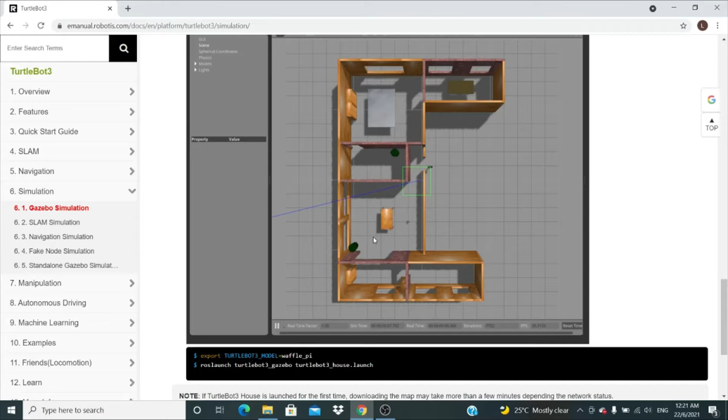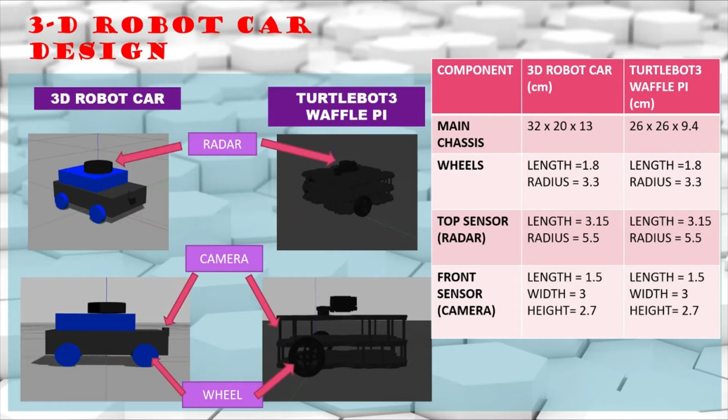The robot car design is mostly influenced by the dimensions of the TurtleBot3 Waffle Pi model, such as wheel length and radius and the position of the sensor relative to ground. The table shown compares the dimensions of the TurtleBot3 Waffle Pi and the designed robot car. As you can see, the wheel dimensions and sensor dimensions are similar.

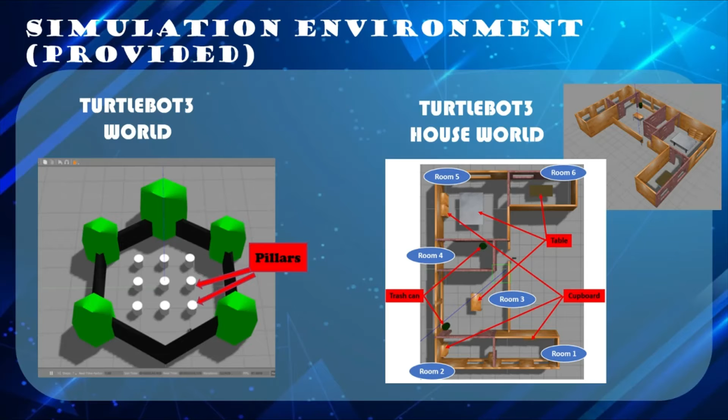As for the simulation environment, the provided simulation environments such as the TurtleBot3 World and the TurtleBot3 House World are used as early driving routes for the robot car. Obstacles such as pillars, walls, and furniture sets are present as variables during robot car driving simulation.

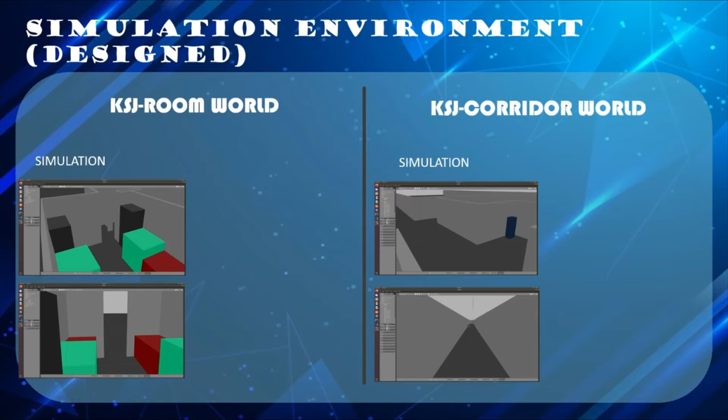Next, new simulation environments were created using the Gazebo Building Editor feature. Two environments were created, which are KSJ Room World and KSJ Corridor World. These environments are designed replicas based on Kolej Siswajaya, Universiti Teknologi Malaysia hostel room and corridor respectively.

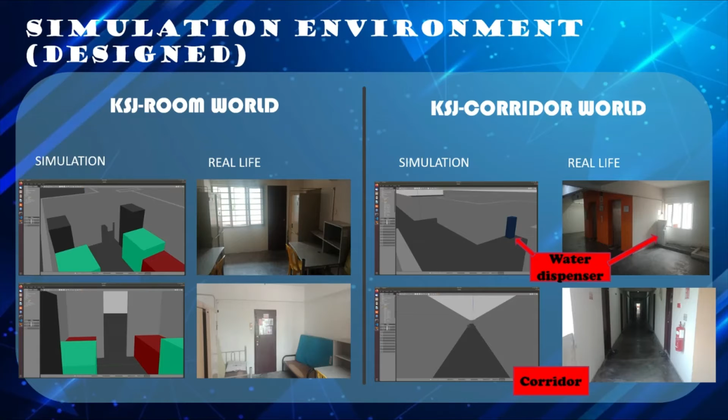Obstacles such as lockers, beds, trash cans, and benches are included, similar to the real life ones. Measurements of each exterior were measured manually using a measuring tape.

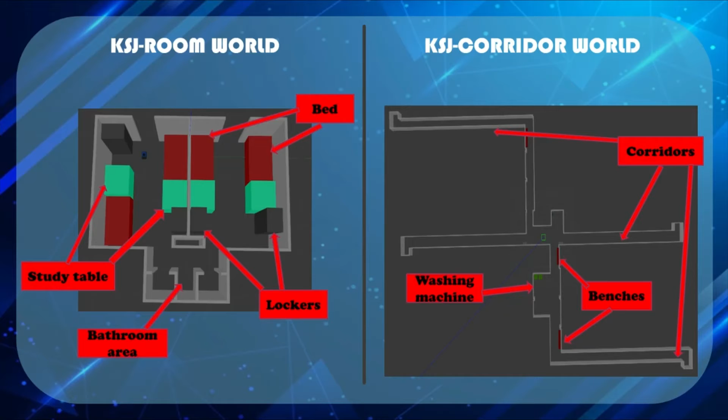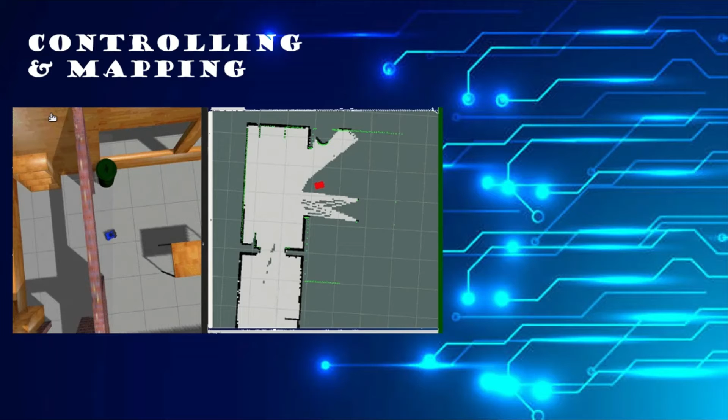To get the robot car to drive autonomously, the robot car must first familiarize itself with its environment. This can be done by controlling the robot car to map the entire environment to create a 2D map of the environment layout using a simultaneous localization and mapping algorithm, or SLAM for short. It generates a map of the environment the robot car's sensors picked up and simultaneously locates its position.

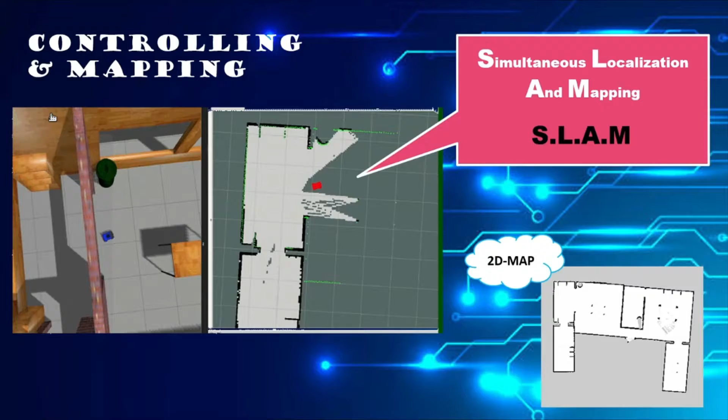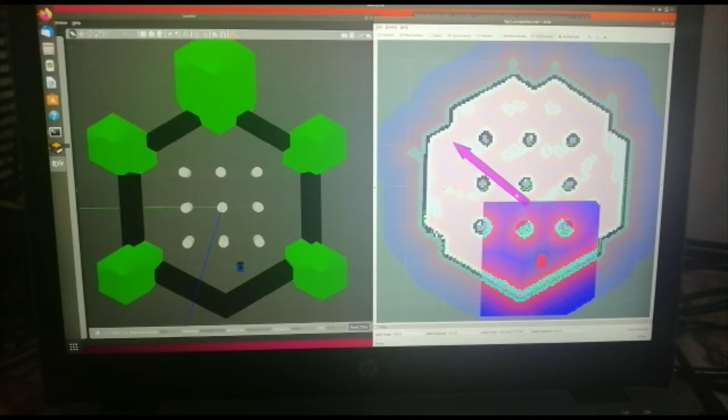To demonstrate the autonomous driving simulation, here I have two programs running. One is the robot car in the 3D simulator, and the right one is the robot car in the generated map for navigation purposes. So if I set a destination to go here, as you can see, the robot is generating a route to reach the destination. And here, in the simulator, the robot is moving in correspondence to my set point to reach the destination.

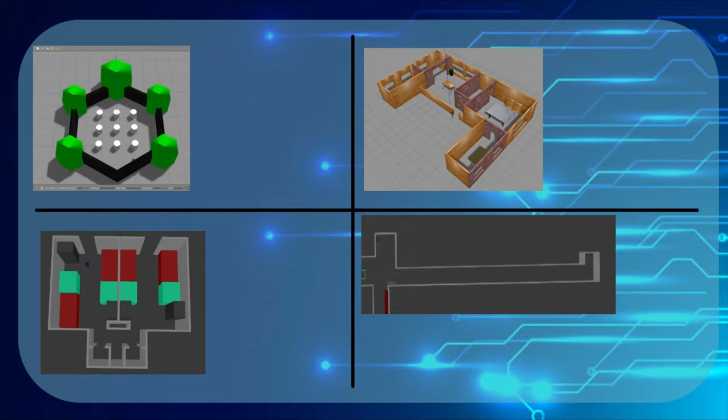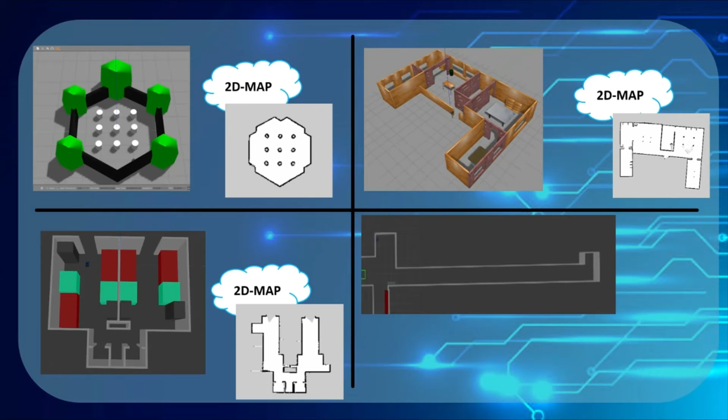The mapping process and autonomous navigation tests were executed on all four simulation environments to experiment with the mapping accuracy. It is found that the 2D maps generated from mappings of the TurtleBot3 world, TurtleBot3 house world, and KSJ room world are quite accurate and able to drive autonomously with little to no error. However, mapping for KSJ corridor world created inaccurate 2D map dimensions.

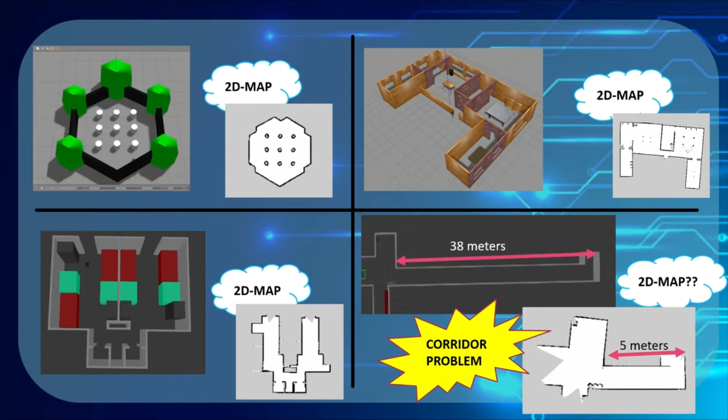For instance, the length between this point and this point is 38 meters, but the map generated is only 5 to 6 meters. This problem is known as the corridor problem, where the mapping algorithm thinks that the robot car is not moving when its sensor scan data are always the same in long corridors. Two different approaches were tested to solve the corridor problem. First is adjusting the parameters of the mapping algorithm.

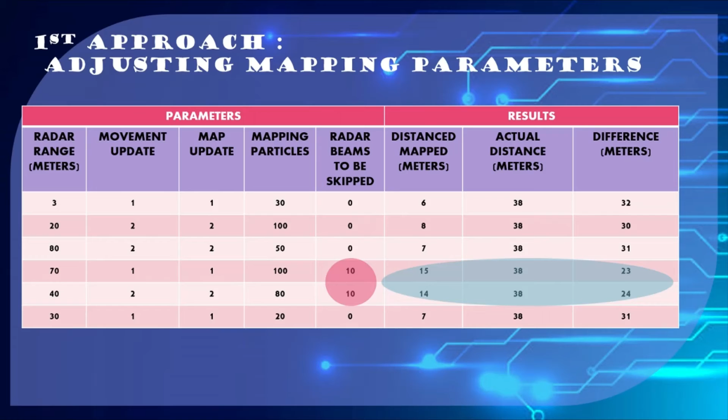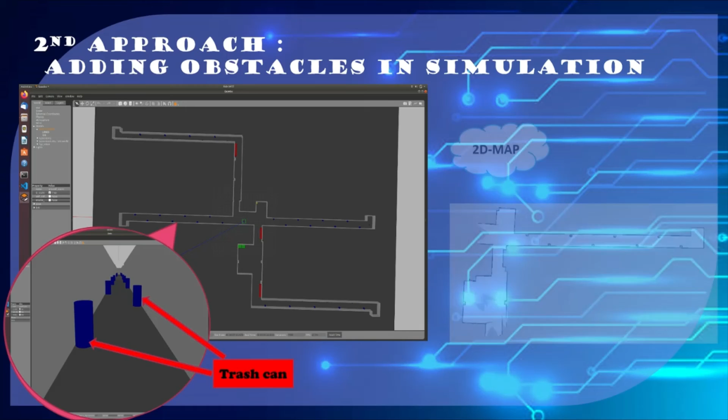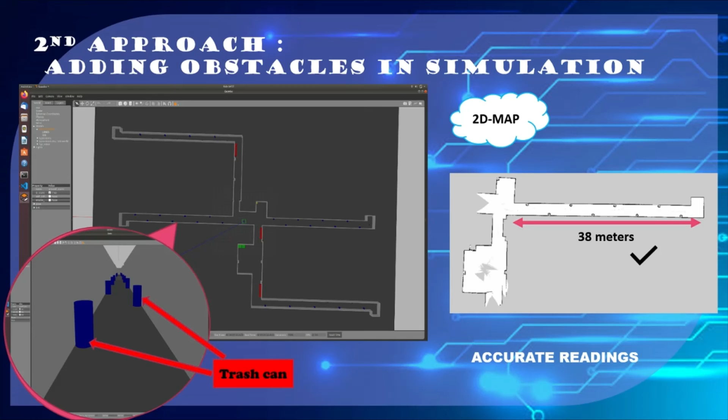The second approach is adding obstacles along the corridor so that the mapping algorithm can sense some change when mapping the corridor and assume that the robot car is certainly moving. This approach works well, and the resulting 2D map generated is accurate, having the same length as the environment. Hence, the second approach was used as the solution to the corridor problem due to better mapping accuracy. The environment simulation of KSJ corridor world was changed by adding trash cans along the corridor.

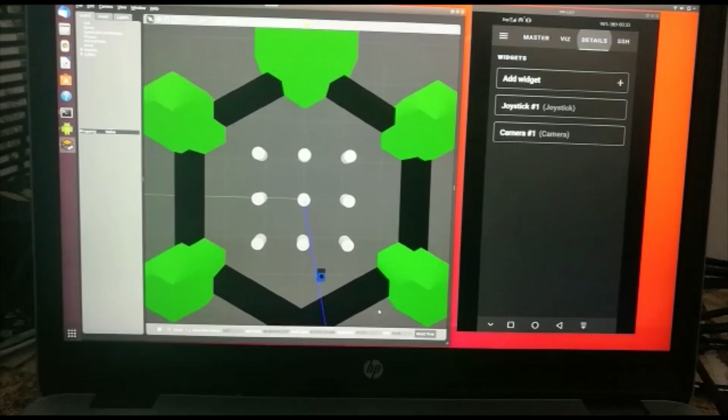First is connecting the phone's IP address to the simulation computer's IP address. Once connected, users can add widgets such as a joystick to control the robot, a camera to view the environment from the robot's view angle, and many more. The robot car simulation can be controlled and mapped from the mobile app, and the navigation driving can be visualized from it also. As you can see, the robot is moving when I use the joystick.

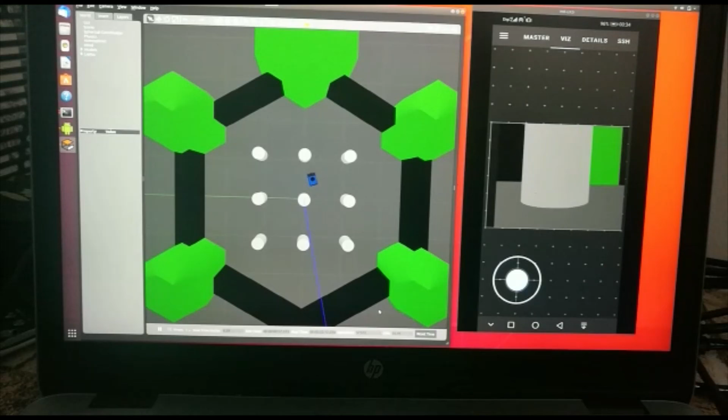To summarize, this project aims to control an autonomous robot car simulation via a mobile app. The robot car simulation was designed and tested in different simulation environments. The robot car's mapping accuracy was tested and improved. And finally, using a mobile app to connect and control the robot car simulation.